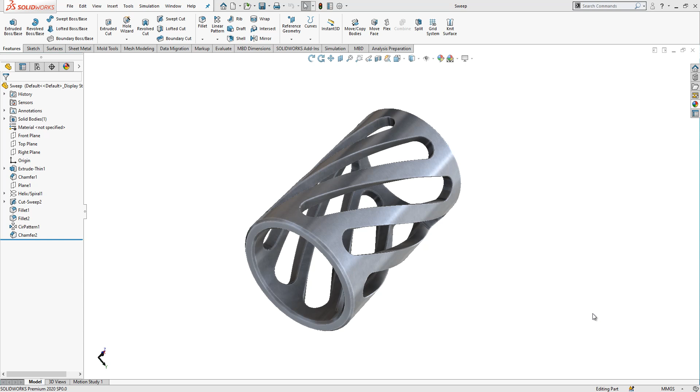Let's start. First, we open a new part, and in the front plane, I will create a sketch. I pick from here a circle with a diameter of 40. Then we go to extrude. I change the direction of extrusion. Here I put 70.

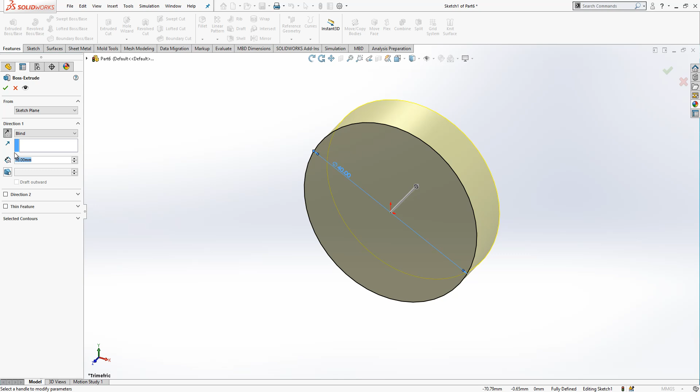Here I activate thin feature. I change direction, it will be inward, so our sketch will be the leading outer diameter. So here I can say 4 and close this operation. This is what we want.

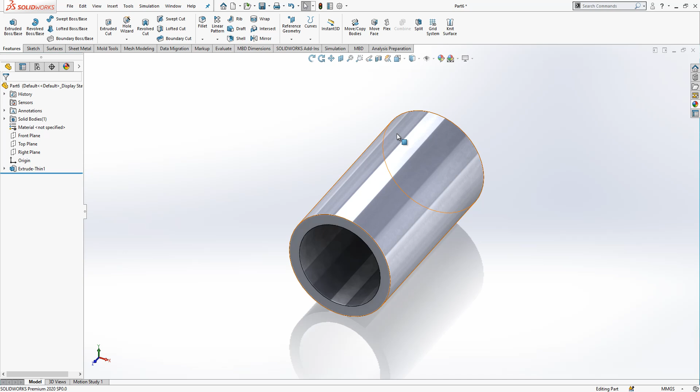I select chamfer, 0.5 chamfers inside and outside. If you select faces, the edges which are touching that face will also be chamfered. If you want, you can select individual edges also.

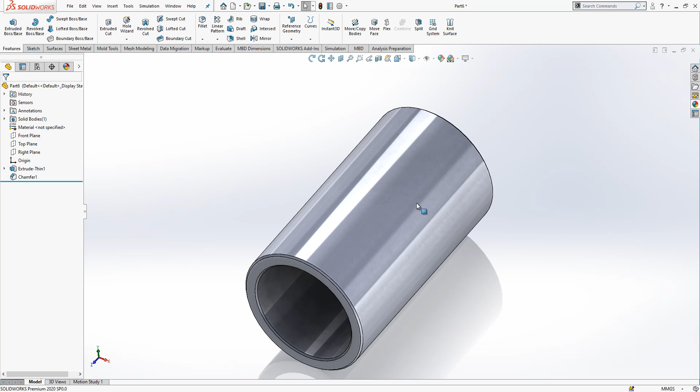So front plane here, and we open a new plane, and it will be at a 6 mm distance with respect to our front plane. Then in this new plane I create a sketch. I convert this edge as a new sketch on this plane.

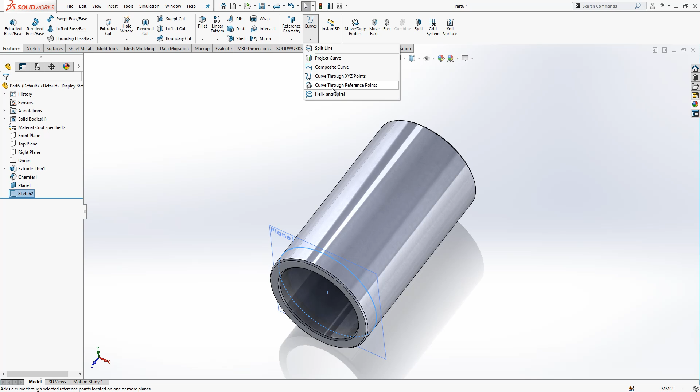So then we go to Helix and we create a revolution of 0.25 and 232 pitch and helix. So where is the 232 coming from? Because I want to have in this height only 0.25 circle revolutions,

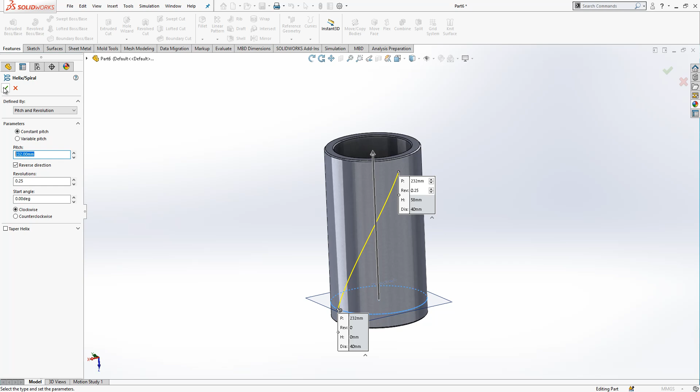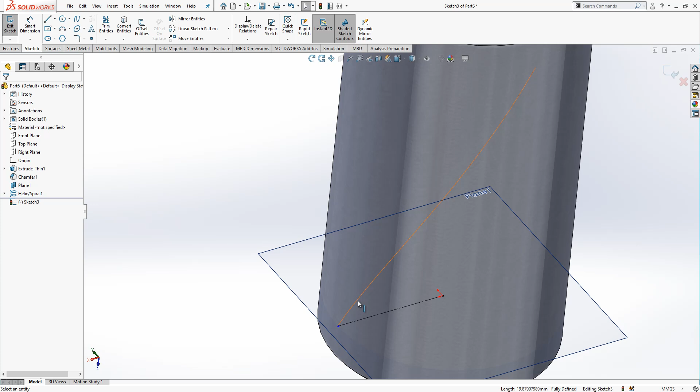Now I create here a sketch, and here I will create a center rectangle. So what you can do, you can have a line and combine to this helix and convert this to a construction geometry. Click the helix and click to your point while control pressed, and then you make pierce.

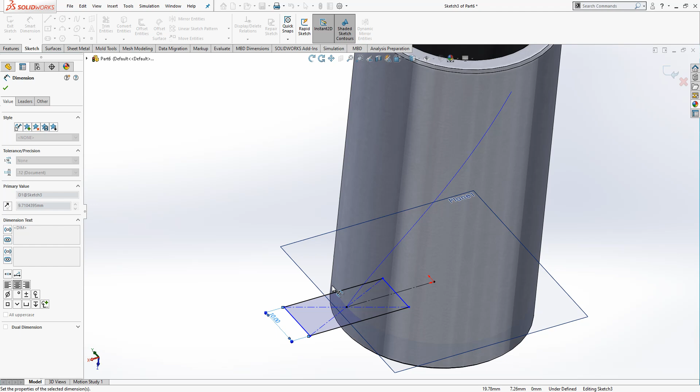So you are at the point where the helix starts now, and then we can put on this point a rectangle with this center rectangle. Our width is 10. So once this is done, we should make sure that this is bigger than where we are cutting, so we can constrain, which is fine, and then we close this operation.

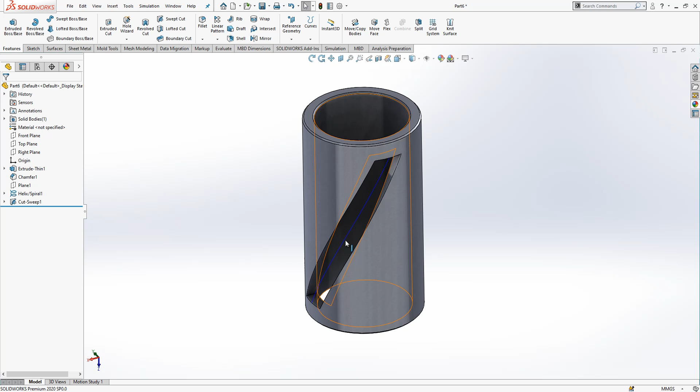Now we select swept cut. This is the profile that we're gonna cut, and then we say OK. So at the end you get this. If you are here already, this is 90% of the modeling operation.

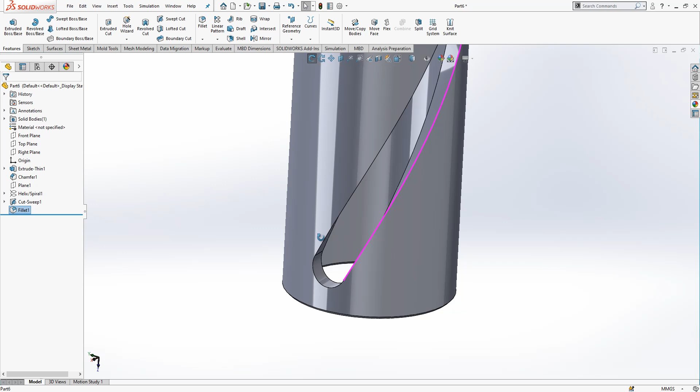So we got fillet. The last operation will be the full round fillet. That will need 3 successive surfaces, and with this you can create here this nice rounding shape, and then you can go fillet one more time, repeat the same operation for this point.

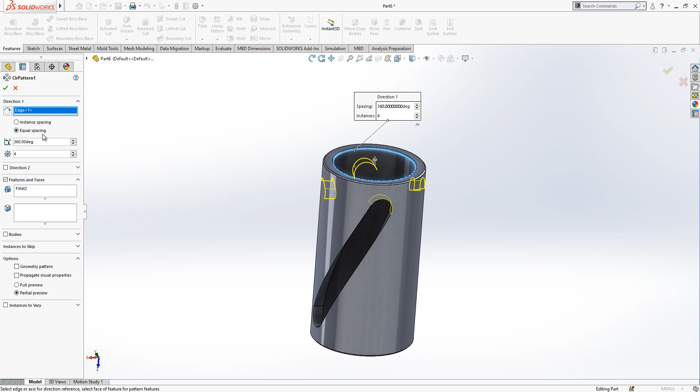Yes, once you are done with this, you go to circular pattern, you select a circular surface, and I will create here 4 times this cut slot with the radiuses as well. So this was it. Yes guys, we are done.

I hope you could follow it. It's a very simple part, maybe not for beginners, but it is a very nice example. You see a lot of things. You see creating a plane and cutting with a sweep and helix, and yeah, a special way of filleting.